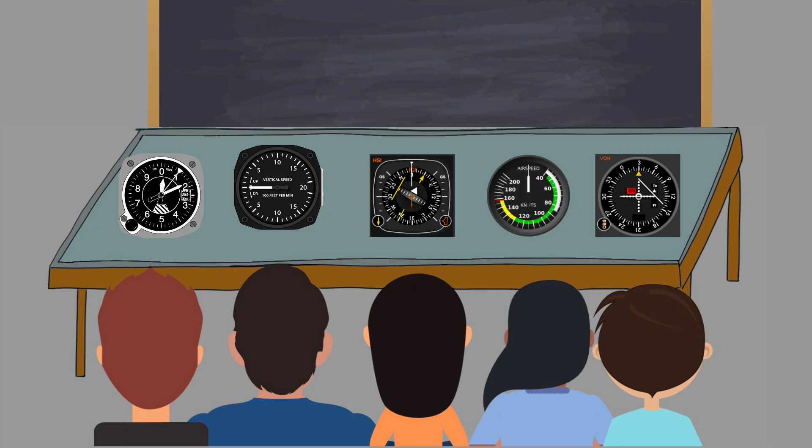At the end of the day, they finally get to inspect the important aircraft instruments. Pat couldn't stop the smile forming on his face. Each student was assigned an aircraft instrument, and the vertical speed indicator was assigned to Pat.

Unfortunately, with all the aircraft instruments assigned, Pat was the most unfamiliar with the vertical speed indicator, thus giving him a hard time familiarizing himself with the said instrument.

They already used up their work immersion hours for the day, so Ma'am Alicia just set their current activity into an assignment. They were tasked to research more on the instrument assigned to them and present it by the end of the week. Ma'am Alicia wished them a safe trip back home and dismissed them.

The moment Pat arrived home, he opened his personal computer and researched about the vertical speed indicator. He is determined to make a good impression in front of experts in his desired field of profession, and put all of his effort into this presentation.

Of course, Pat started with the basics, the definition. He learned that the vertical speed indicator is also referred to in various names such as the variometer, rate of climb and descent indicator, and the vertical velocity indicator.

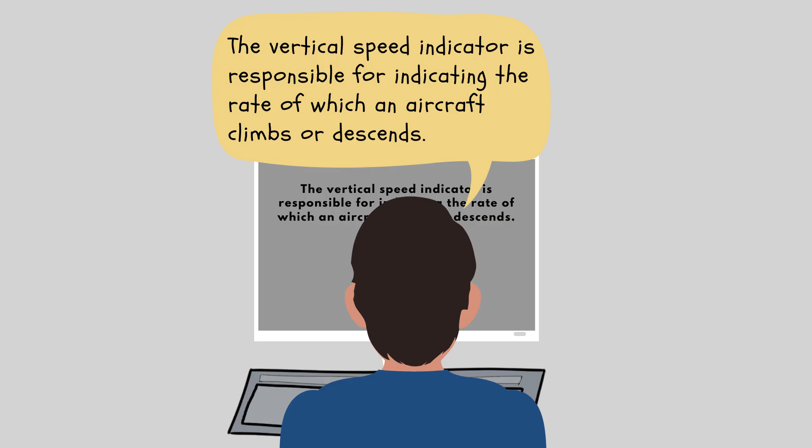The vertical speed indicator is responsible for indicating the rate at which an aircraft climbs or descends. The VSI can be calibrated to display the rate in meters per second, in feet per minute, or in knots.

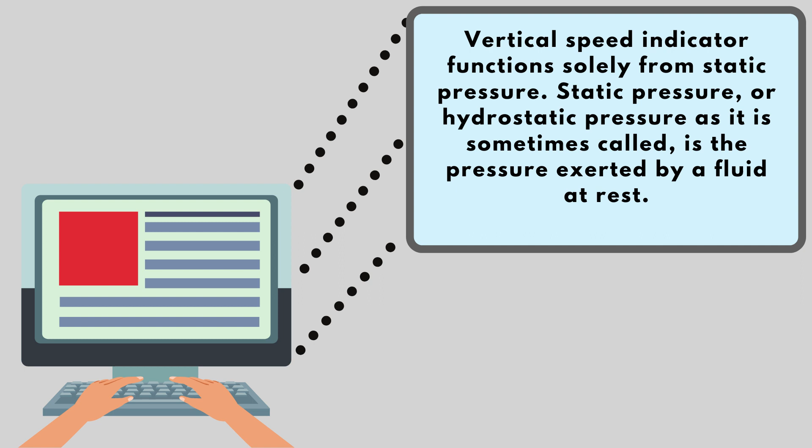The vertical speed indicator functions solely from static pressure. Static pressure, or hydrostatic pressure as it is sometimes called, is the pressure exerted by a fluid at rest. Since the fluid is not moving, static pressure is the result of the fluid's weight or the force of gravity acting on the particles in the fluid.

With Pat's interest in the instrument growing as he continues to read about its importance, he decided to look into how the instrument works.

He learned that a simple VSI can be constructed by adding a large reservoir, like a thermos bottle, to increase the storage capacity. In its simplest electronic form, the instrument consists of an air bottle connected to the external atmosphere through a sensitive airflow meter.

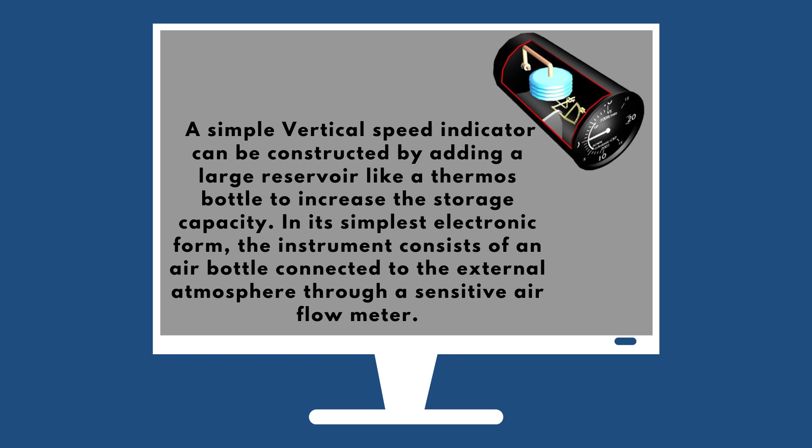As the aircraft changes altitude, the atmospheric pressure outside the aircraft changes, and air flows into or out of the air bottle to equalize the pressure inside the bottle and outside the aircraft.

Though the things mentioned earlier apply to older models of the vertical speed indicator, newer models directly measure the static pressure of the atmosphere using a pressure sensor and detect changes in altitude directly from the change in air pressure instead of by measuring airflow.

These designs tend to be smaller as they do not need the air bottle. They are more reliable as there is no bottle to be affected by changes in temperature, and there is less chance for leaks to occur in the connecting tubes.

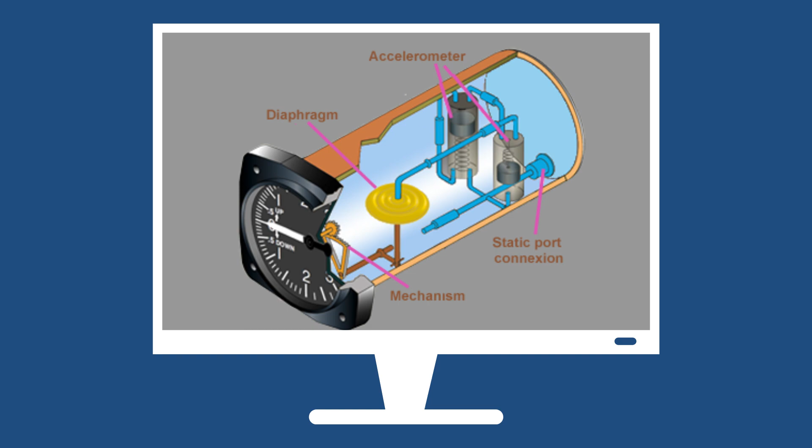The VSI uses the aircraft pitot static system to determine the vertical speed and depicts the result on a conventional needle and circular scale instrument, or on a ribbon at the side of an electronic flight instrument system, EFIS.

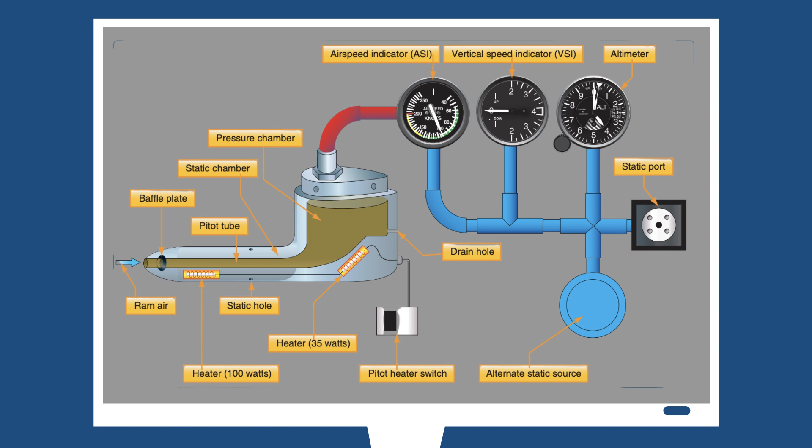In a simple VSI, a barometric capsule is contained in a sealed case. The capsule is fed with static pressure from the pitot static system, while the case is also connected to that system through a calibrated nozzle.

The nozzle restricts the passage of air so that there is a time delay between a change in static pressure and that pressure being experienced within the case. Thus, if the aircraft climbs, the pressure within the capsule will decrease, while that within the case will decrease at a lower rate due to the presence of the nozzle. Movement of the capsule is translated into movement of a needle by a mechanical system.

Pat was also able to learn the important components of the vertical speed indicator: the diaphragm and the calibrated leak. The diaphragm is a flexible metal container connected to the instrument's static air source. It's also connected to a set of gears and rods that move the VSI's needle up and down, and that happens when the diaphragm expands and contracts.

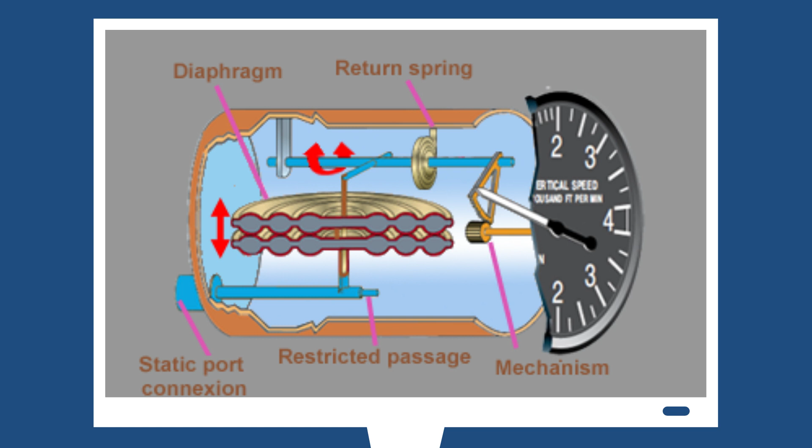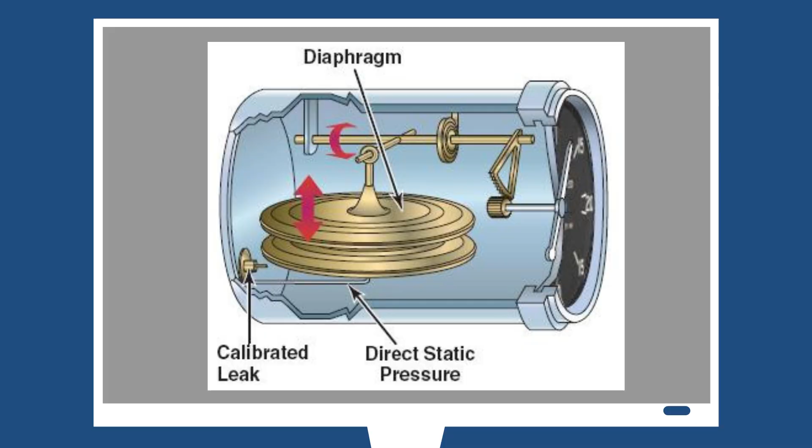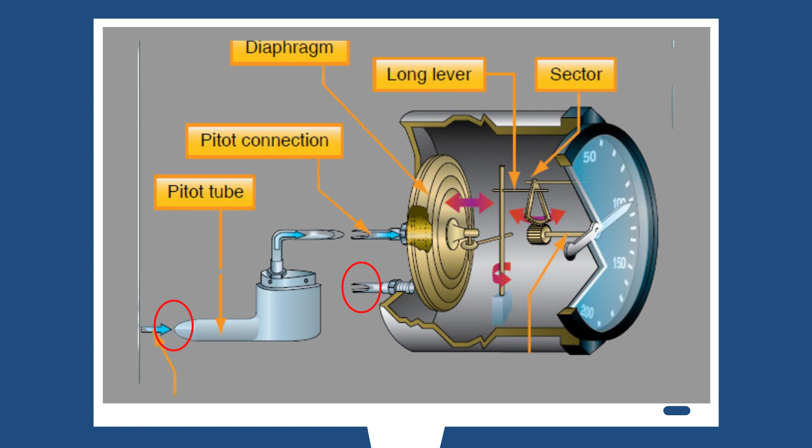The calibrated leak is a tiny hole that connects the casing of the VSI to the static source. However, the hole in the calibrated leak is small enough that it restricts airflow, therefore unable to move in and out as fast as the diaphragm. Due to the vertical speed indicator relying on the air leaking in and out of the casing, it needs a little more time for everything to stabilize, therefore needing the concept of trend versus rate.

When you initially start climbing or descending, your VSI needle will start moving, but it can't immediately indicate how fast you're climbing. This is what's called trend information. When you see the direction of the needle moving up, you know your climb rate is increasing, and when it moves down, you know your climb rate is decreasing.

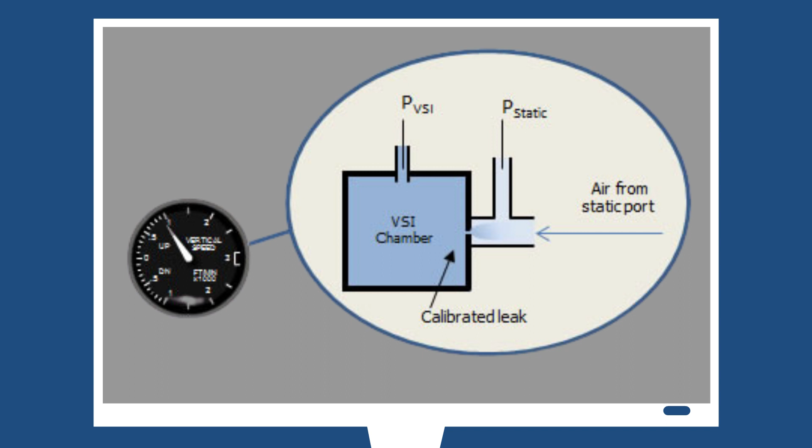After a second or two, the calibrated leak has a chance to catch up and reach equilibrium, and your VSI will stabilize at a certain climb or descent rate. When that happens, you have rate information.

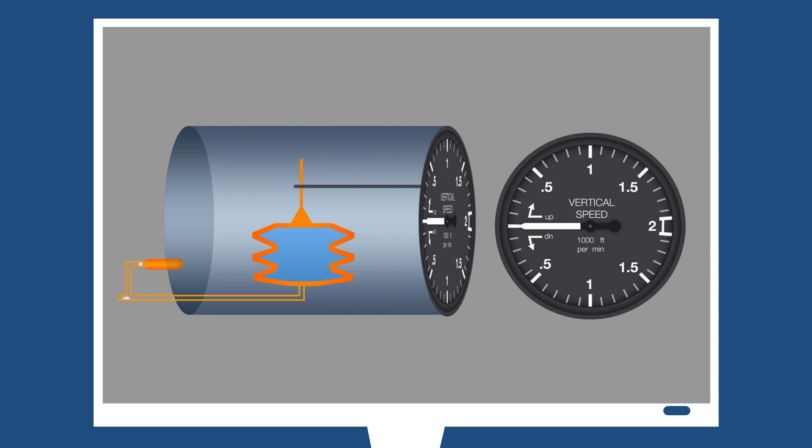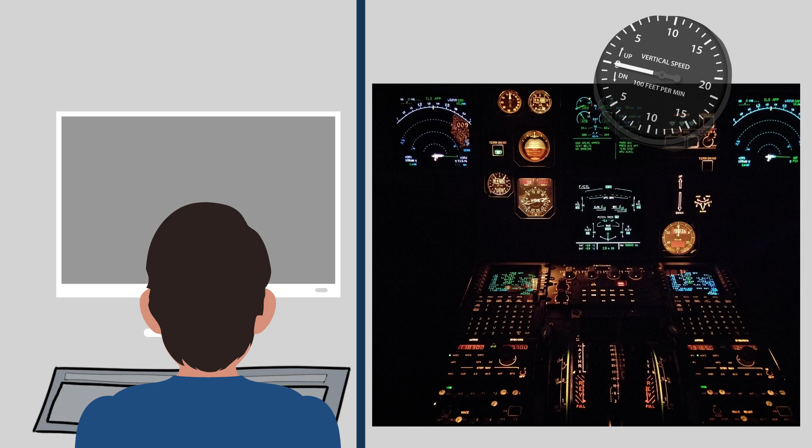Pat was also able to learn that there are a few things that the pilot should consider and check on the vertical speed indicator before the aircraft is ready for flight. He learned that the VSI should read zero before the flight takes place. In special cases, the instrument can still be used even though it doesn't display zero, but the rate it displays should now be considered as the basis, like you would on a zero display.

This, of course, is highly discouraged as it can create more errors that may cause serious hazards, especially when it comes to weather.

Speaking of errors, Pat also took note of the errors that are possible when using the vertical speed indicator. He learned that the speed indicator is more sensitive than that of an altimeter, but it inherently lags, causing a 6 to 9 second delay that may prevent the instrument from displaying accurate readings right away, especially during any turbulence, severe weather conditions, and abrupt control movements.

Another crucial error that is possible during the operation of the vertical speed indicator is that it will give zero readings when the static port is blocked.